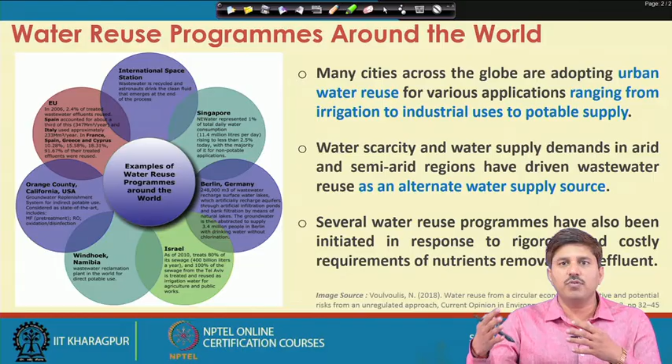So several water reuse programs have been initiated across the world considering water as an alternate water supply source. However, quite a few reuse programs, particularly in the United States, have come in response to the rigorous and costly requirement of treatment. Particularly because of issues related to eutrophication, the discharge norms are getting more stringent, and you need to remove the nutrients from the water if you want to discharge it. So many schemes have come saying that instead of going for nutrient removal, wouldn't it be better to use that water for, say, irrigation, where this nutrient removal requirement is not there. So many reuse schemes aim at saving themselves from this rigorous and costly treatment for nutrient removal.

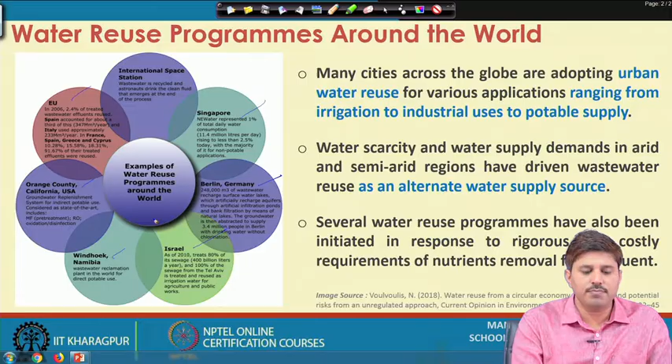So there are quite a few places, starting from Israel, Germany, Singapore, various countries in the European Union, USA, Namibia, where such reuse and recycling programs are being adopted. One of the most talked about and most famous reuse programs is in Singapore. In Singapore, the Public Utility Board, PUB, recycles the treated sewage even for augmenting domestic water supplies.

They basically started it as early as 1998. There were discussions beforehand as well, but in 1998 they set up a team to test membrane technologies, and two years later they put through a first plant to produce 10,000 cubic meters of water daily. This was high grade reclaimed water, and they did not call it recycled or reclaimed water, but gave it a new name: NEWater. So this NEWater is essentially the reclaimed water.

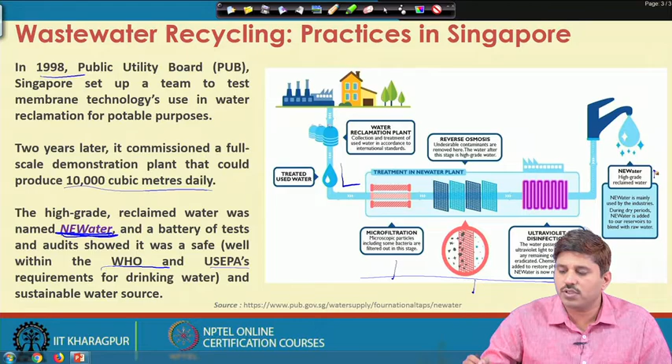They performed some 5,000 tests and several hundred audits, and it was found that the water is completely safe, well within the WHO and US EPA standards for drinking water. And because wastewater is something people will keep on generating, it was perceived as a sustainable source as well. So they take the treated wastewater and pass it through three treatment stages: microfiltration, reverse osmosis, and ultraviolet disinfection for the removal of pathogens, and the water produced is called NEWater. This NEWater is used for non-potable as well as indirect potable uses.

In non-potable, it is used mainly for industrial and air con cooling processes. The wafer fabrication industries particularly are the prime users of this. They are the biggest user of NEWater, where they use it for cooling purposes and for wafer fabrication also. So this water is used.

Now the water quality that is required for wafer fabrication is actually more stringent than the water for drinking, and still this water is being used because it is of that high a quality. Then there are indirect potable uses.

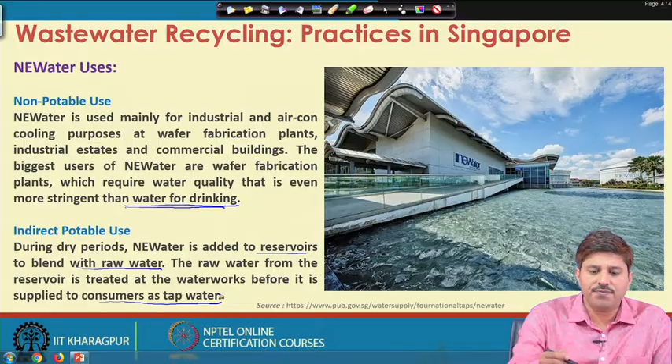During the dry weather periods, when there is not enough water available in the reservoirs, this NEWater is added to the reservoir and blended with raw water, and this raw water from the reservoir is then further treated for drinking water at the waterworks, and then supplied to the consumer as tap water. So basically this is used for augmenting the domestic water supplies as well in the form of indirect potable uses. So those are the two major uses.

Now if we see their critical success factors, because when we are discussing public perception, there have been several plants in Australia and the US which have been stopped by targeted toilet-to-tap campaigns. But Singapore successfully managed it, and there were several factors for this success. There was strong support from the government, then there was a credible reference project.

They took the reference of Orange County in California, where reclaimed water is being used for augmenting domestic water supplies, although not in the open reservoir form. Then there was technology demonstration in the local environment, rigorous assessment for water safety, and several external audits, which put faith in the utility. There was endorsement by a panel of experts; several experts reviewed the process and said that yes, it is safe, so that kind of endorsement also helped.

Then there was effective public and customer engagement, so they made sure that the end users of the water are on the same platform, knowing about all the process and details, and this they achieved through a NEWater visitor centre as well. This is a centre where everybody can visit, and there is a museum also. It talks about the process of generating NEWater, its quality, and there are demonstrations. Those things are open to the public.

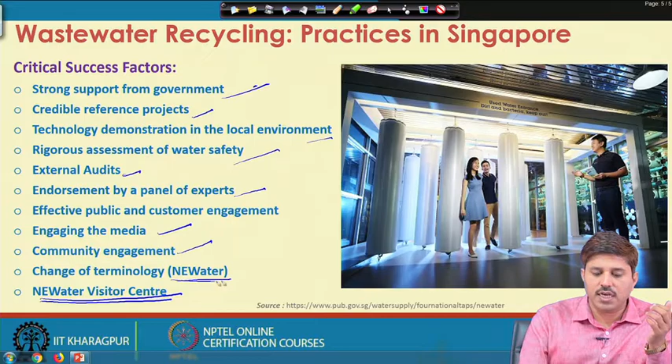They engaged the media and the community. Community engagement essentially means the senators and politicians from different regions were invited and briefed about what is being done and how it is advantageous. They also changed the terminology, because of the disgust which comes from saying, oh, I am going to use sewage, so they got rid of that to some extent by renaming the water NEWater. These are some of the factors believed to have acted in favor of the acceptance of NEWater. There are practices in the United States as well.

A couple of popular schemes are from the Orange County Water District of California, where there is a groundwater replenishment system. This is again an indirect potable use system, the world's largest system for indirect potable reuse. The system takes highly treated water; the treatment here is microfiltration, reverse osmosis, followed by ultraviolet light with hydrogen peroxide for disinfection. That way they produce high quality water that meets and exceeds state and federal drinking water standards, and then they inject this into the groundwater, which is again pumped for domestic water supplies.

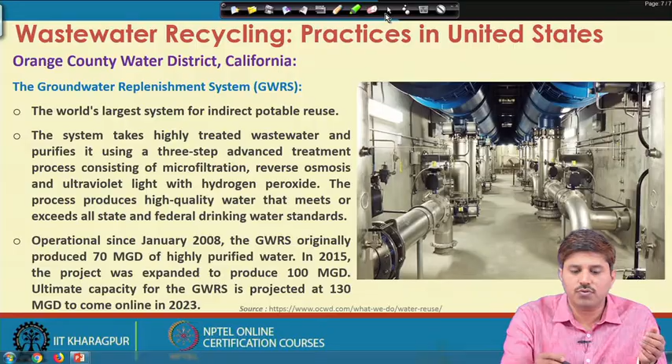Operational since January 2008, this originally produced 70 mgd of highly purified water. In 2015 it was expanded to produce 100 mgd, and they target to produce 130 million gallons per day of water by 2023. This practice existed even before the augmentation; before GWRS they were doing it under another name at a much smaller scale, but from 2008 onwards they made it GWRS with a bigger scale.

This also uses a Green Acres Project, which recycles water for landscape irrigation at parks, schools, golf courses, and also for industrial uses such as carpet dyeing, toilet flushing and cooling towers. So this GAP, which is also called the Green Acres Project, is another reuse from Orange County, where part of that is used for augmenting groundwater.

And so this GAP has a capacity of 7.5 mgd of recycled water. In 1991 the GAP provided an alternate source of water to various cities including Costa Mesa, Fountain Valley, Newport Beach, Santa Ana. There are approximately 100 different sites currently which use the GAP water for these different purposes.

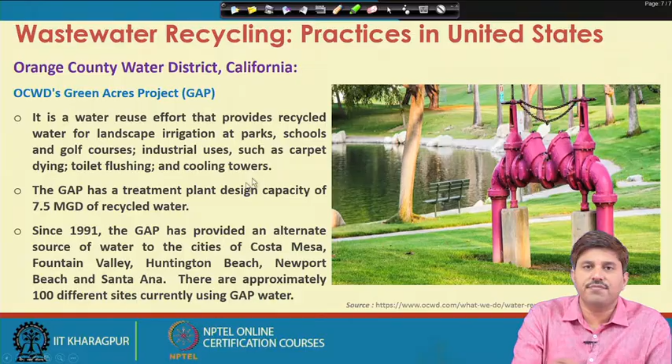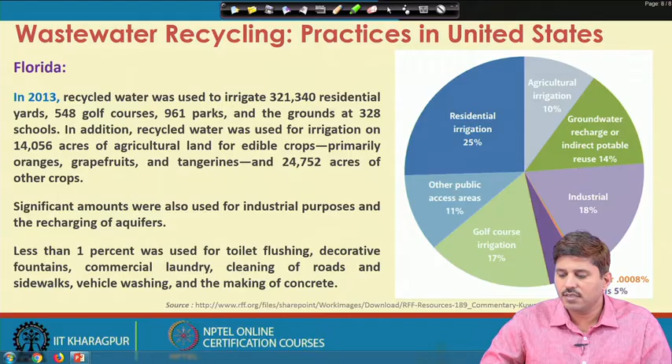Then if we talk about the extent of recycling, Israel is the world leader in this. Israel claims to use over 85% of the wastewater generated across the nation, which amounts to over 400 million cubic meters of water a year that is purified and reused. So that's how Israel is considered the world leader in reusing wastewater. No other country goes to that extent.

I think Spain comes second, at a range of 20 to 25% of the wastewater generated being reused. The water treated for reuse in Israel is primarily through conventional processes, and it is mostly used for agricultural irrigation. So there are risks associated with that, but still it is being reused. Roughly 10% of water goes to environmental purposes, such as increasing river flow and volume, or for fire suppression. Very little is discharged into the sea.

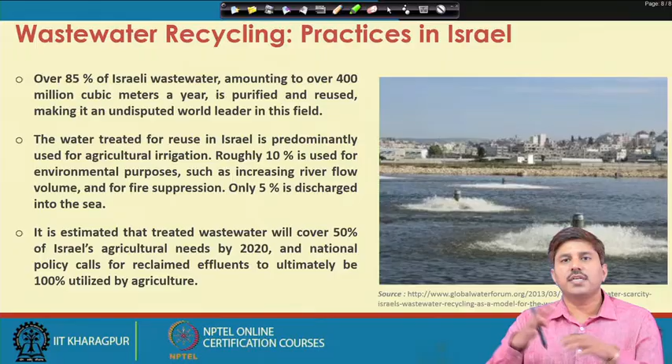So most of the uses are agricultural, and they have estimated that this wastewater will cover 50% of their total agricultural needs by 2020. So the national policy calls for ultimately 100% utilization of the reclaimed wastewater for agricultural purposes, which can cover almost 50% of their total agricultural demand.

Japan is also faring pretty well in terms of wastewater recycling. In Japan, reclaimed wastewater is used for various non-potable urban applications like toilet flushing, landscape irrigation, cleaning roads and snow melting. The government has come up with a policy, Sewage Vision 2100, that suggests creating sound water cycles by using reclaimed wastewater effectively.

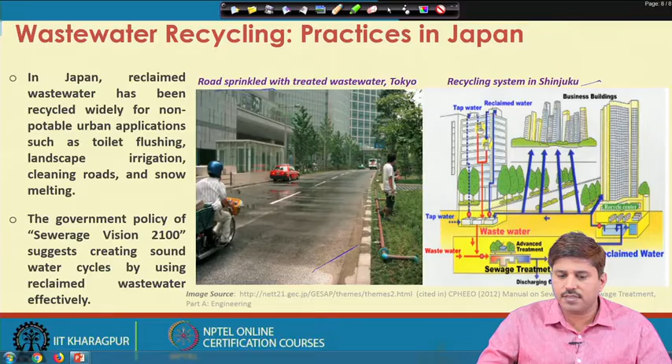So their popular reclaimed uses are road sprinkling. There is an example of roads sprinkled with wastewater in Tokyo. They have toilet supply with reclaimed water in several areas of Tokyo, and in fact in Tokyo they have made it mandatory for larger complexes to have a recycling system, particularly toilet grey water recycling systems.

Now, if you see the wastewater recycling practices, the Tokyo metropolitan government is using wastewater for toilet flushing in an area-wide water recycling system. They treat it to the tertiary level and then use it for toilet flushing.

Another very effective and popular case study of the Tokyo metropolitan government is that they use highly treated water from their Ochiai water reclamation center to restore the abandoned Meguro river. Initially the river used to look like this; it passes through some of the residential areas of Tokyo, and it was in a very pathetic situation.

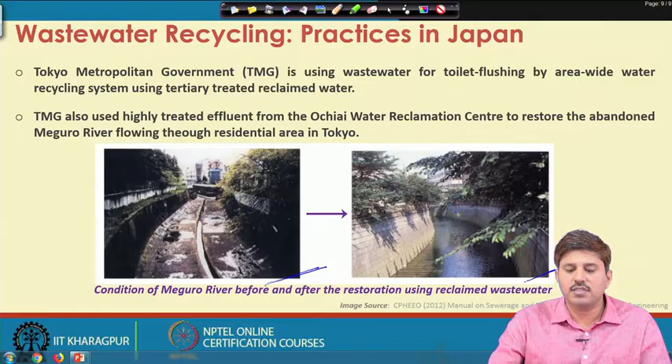So, they started putting the treated wastewater, reclaimed wastewater in this, and the condition of the river has been improved drastically. So, this has effectively converted to this after the implementation of this strategy.

There are recycling systems placed in the different cities or different states in Australia. If we see their wastewater recycling by jurisdiction, the different states of Australia, this data is a little older, of 9-10, but that is what is available. New South Wales was almost recycling 10% of their effluent, Victoria was doing fairly good, like 1/4 of the total wastewater generated was getting recycled. Queensland again almost 1/4, then South Australia was again quite good in that sense.

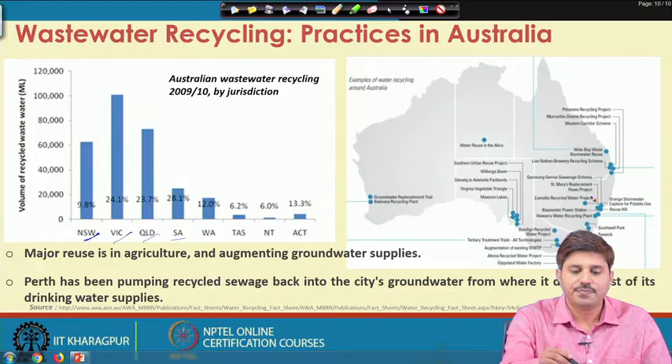So, the different states have different systems. Major reuse is in agriculture and augmenting groundwater supplies. In Australia, in Toowoomba, there has been a case of public opposition to reusing water for drinking water supply. So, they are very cautious about that, but still have started plants. Perth has been pumping recycled sewage back to the city's groundwater, from where it draws most of its drinking water supplies. So, there are various recycling systems across the nation. That is the status in Australia.

If we see the practices in UK and Europe, particularly the Wulpen STP in Belgium treats over 2.5 gigaliters of water per day with microfiltration and reverse osmosis, followed by storing it for 1 to 2 months in an underground aquifer and then using it for water supply augmentation. So, that is again an indirect potable reuse kind of system. It also utilizes recycled grey water for industrial and non-potable purposes.

A major wastewater recycling plant in England is located at the Millennium Dome, on the bank of the river Thames, and it treats around 500 cubic meters of household wastewater and rainwater per day. This treated water is blended with groundwater and fed to the reed bed, which is a constructed wetland, followed by chlorination, and reused for flushing toilets and urinals. Germany and Holland mainly utilize treated wastewater for toilet flushing, laundry, car washing, those kind of things. Irrigation uses are fairly minor in these nations, whereas Italy, Poland, Hungary mostly utilize recycled wastewater for irrigation.

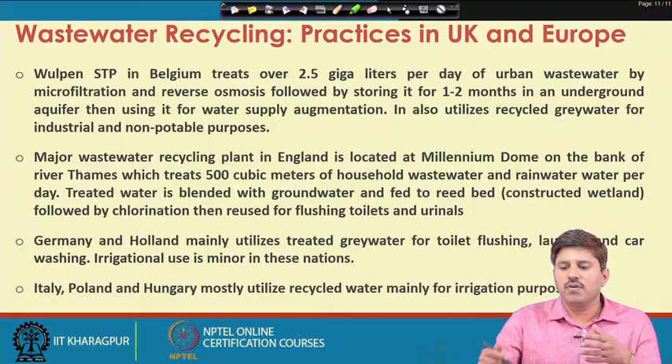If we see other nations, treated wastewater from 4 sewage treatment plants in Seoul, South Korea is used for cleaning and wiping structures and infrastructure within the plant and the roads outside the plant, and particularly from the Jungnang STP, the water is drained for cleaning of the coaches at nearby subway coach depots. So, that is the reuse in Korea.

Then various African countries like Namibia, Zambia, Tunisia, South Africa have been utilizing recycled wastewater for quite some time now, and they are forced to, because there is acute freshwater scarcity. We heard the case of South Africa, where the water balance ran out to zero. That kind of situation is there in African countries, and that is how they are motivated to recycle water. Particularly the Windhoek treatment system in Namibia is fairly successful, recycling water for augmenting potable water supplies.

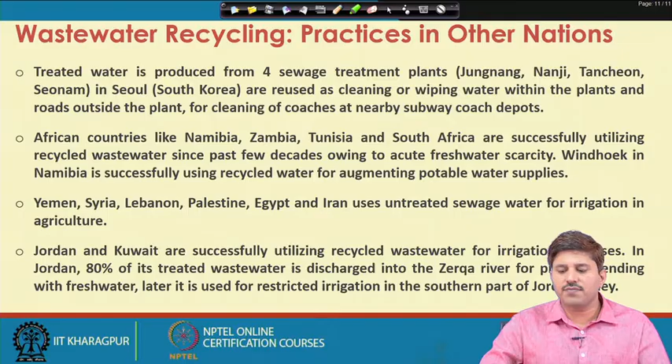Then Yemen, Syria, Lebanon, Palestine, Egypt and Iran are using untreated sewage for irrigation in agriculture. Jordan and Kuwait are utilizing recycled wastewater for irrigation, so treated wastewater is being used in these countries. Particularly in Jordan, 80% of its treated wastewater is discharged into the Zerqa river for proper blending with fresh water, and later it is used for restricted irrigation in the southern part of the Jordan Valley. So, that is about the things happening across the world.

Now, if we see India, what practices are under operation in India? There are many small scale attempts being made, and they have shown quite promising results as well. Chandigarh is using treated sewage for horticulture needs of its green area. IARI in Karnal, the Indian Agricultural Research Institute, has done research and come up with a recommended irrigation method for sewage fed tree plantation, for sewage farming systems. In Calcutta, sewage is used for fish farming. Bangalore is the first Indian city planning to use recycled sewage for augmenting domestic water supplies as indirect potable reuse.

So, they actually have an idea of essentially putting in a pilot model of Singapore's NEWater. Like Singapore's NEWater is achieving this indirect potable reuse option, Bangalore is also trying to come up with a system like that. This is actually the plan for that scheme: the indirect potable augmentation by 135 MLD of advanced reused sewage in the city of Bangalore. So, that is the plan, and the details of the plan are like this.

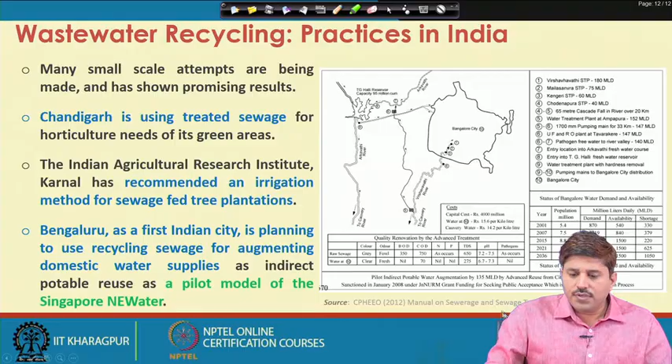If we see the other uses, in metropolitan cities like Delhi, Mumbai, Bangalore, Chennai, Hyderabad, Ahmedabad, there are systems particularly for grey water, which is being recycled and reused for toilet flushing in the major high-rise apartment complexes. Okay. So, that is being done on a pilot scale in several apartments.

Delhi has put in place a planned reuse of treated sewage for various designated institutional centers. One of the prime examples is Indira Gandhi International Airport in Delhi, which uses different grades of reclaimed water for cooling purposes, for toilet flushing and for horticulture. So, this is the plan for the Indira Gandhi International Airport water reuse system.

So, they get 5 MLD sewage from the utilities, they get 3 MLD from the toilet flushes, and from the older STP they get 5 MLD. So, that 5, 5, 10 plus 3, total 13 MLD water they take, and they treat it with the newer STP to different degrees. Out of this 13 MLD, 3 MLD, after the STP, they put through the filter, chlorinate it and put it for toilet flushing, which again goes here. So, that is your one cycle.

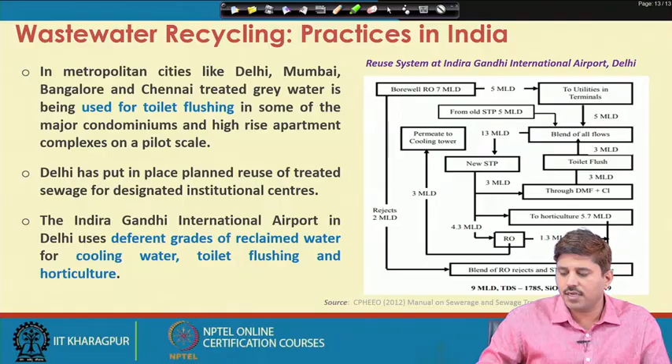So they treat it through DMF and chlorination and then put it for toilet flushing. The STP treated sewage is used for horticulture, and they put an additional step of RO and use it for the cooling tower. So that is what is happening at IGI airport, the reuse system.

The concept of using treated wastewater for industrial activities is also gaining quite some popularity. Okay. So there are various industries who purchase the secondary treated sewage and then further treat it and reuse it in cooling water makeup or a few other industrial processes. Some of the examples are Madras Refineries or Madras Fertilizers, which are situated in Chennai, then Rashtriya Chemicals and Fertilizers of Maharashtra, and there are several other companies in different cities, some in Surat, so there are quite a few companies.

So this is a treated sewage reuse example as cooling water at a thermal power plant in Chennai. So this is a kind of thermal power plant reuse option. They take the city sewage, then do equalization, screening, all those standard treatments, BOD removal, nutrient removal, then sludge thickeners, then lime dosing and all these different types of dosing, and finally they centrifuge, do cartridge filtration and spiral reverse osmosis processes, and put it as makeup water at TDS less than 500. Okay, that is how they reuse it.

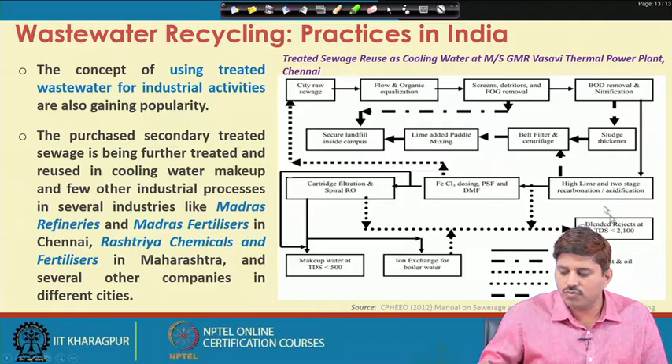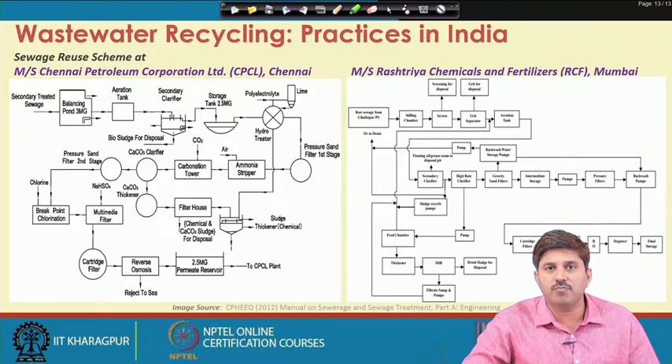So this is a reuse scheme at Chennai Petroleum Corporation Limited, which is CPCL in Chennai. The right side one is for Rashtriya Chemicals and Fertilizers, RCF Mumbai. So there are different systems actually in place.

So if we see the overall practices, the industries are using reclaimed water, but for the water that is being generated by the industry, the government is also forcing this through the zero liquid discharge policy, which is typically known as ZLD. The government is making it a mandate particularly for the grossly polluting industries, okay, like thermal power plants, steel manufacturers, petrochemical industries, and various chemical and pharmaceutical manufacturing industries.

So there are 12 specific types of industries which have been brought under the umbrella of ZLD, that they have to opt for zero liquid discharge systems, including distilleries and other grossly polluting industries. So the government has come up with a mandate that they have to adopt ZLD practices. ZLD practices essentially mean that you recycle your entire waste and do not leave anything outside the plant

periphery. There has been a techno-economic feasibility report from the Central Pollution Control Board that talks about ZLD systems and how they can be implemented. So that is one development which is taking place: preventing industrial effluents from going into the river and ensuring the complete reuse and recycling of industrial

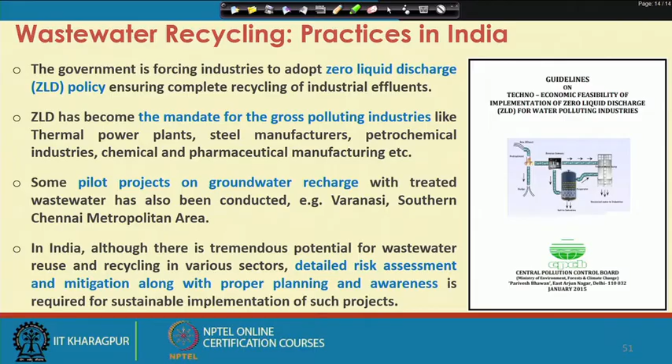So a detailed risk assessment and mitigation policy should be prepared, and along with that, proper planning and awareness is very much required for sustainable implementation of these recycling projects in the country. So there is enough potential; the only thing is that we should be able to harness it. We need the technical skills, the social acceptability, adequate funds, and adequate technologies that ensure minimal risk, and adequate risk assessment measures.

So if we look to the future, water reuse for future supplies and reliability is a must. We should have water reuse systems where we can use water for factories, streams, agricultural purposes, and different purposes. So we can bring it into the water cycle. The wastewater should also come into the water cycle.

And if we look at the utility of the future, ideally a wastewater utility should be a kind of resource recovery factory. So what can we recover? Once we receive the wastewater, through the basic primary treatment and so on, we can recover energy out of this treatment, like through the anaerobic digestion or incineration processes we discussed. So there is a possibility of recovering energy, and we should try to use this as an energy factory.

There is a possibility of recovering nutrients after secondary treatment. So we should try to use it as a nutrient factory, for nutrients or other elements like metals. We can use it as a recovery factory for those things, and eventually we should be able to get reclaimed water of usable quality. So we should try to treat it as a water factory which produces water from wastewater.

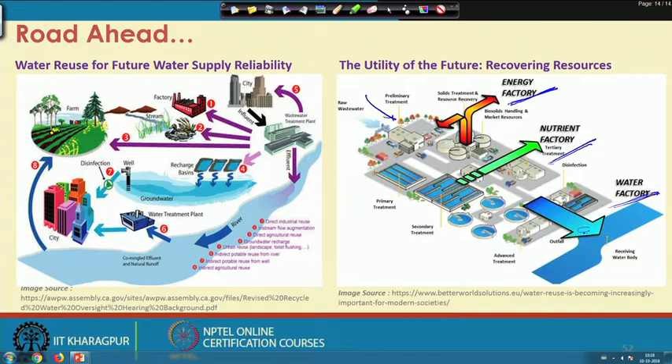So wastewater, with all the pollutants in it, can actually still be used for production of energy, for recovery of nutrients and for reclaiming water out of it, and that is what we should aim for in the future. So this is where we conclude the discussions.

There is quite a lot of literature available if somebody wants to explore more deeply. These are some of the recommended books, or more so manuals, which can be read through for getting more detailed knowledge on the reuse and recycling aspects and water treatment aspects.

So with this we conclude the discussions here. We have completed this 12-week journey and have come to the end of the discussions. Of course, we will try to go through a summary of this entire discussion that we had in the 12 weeks, but content-wise, this is where we conclude our discussions.